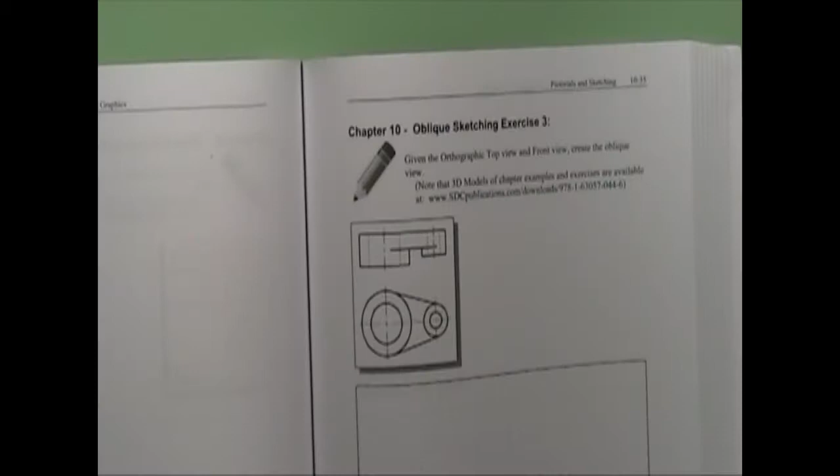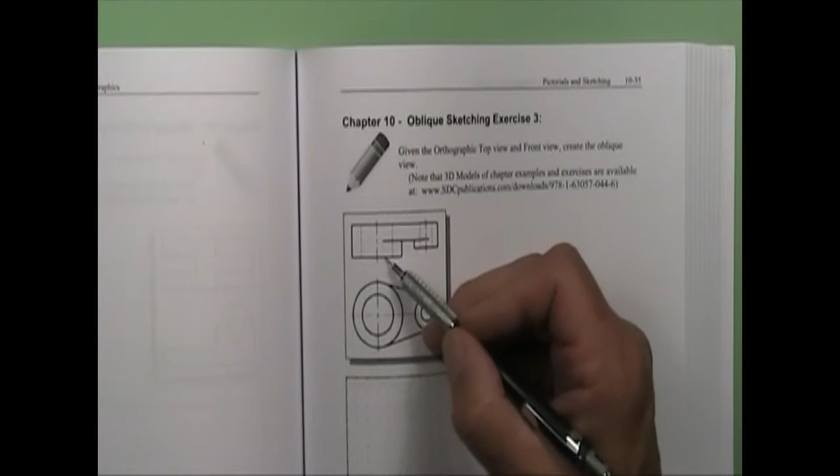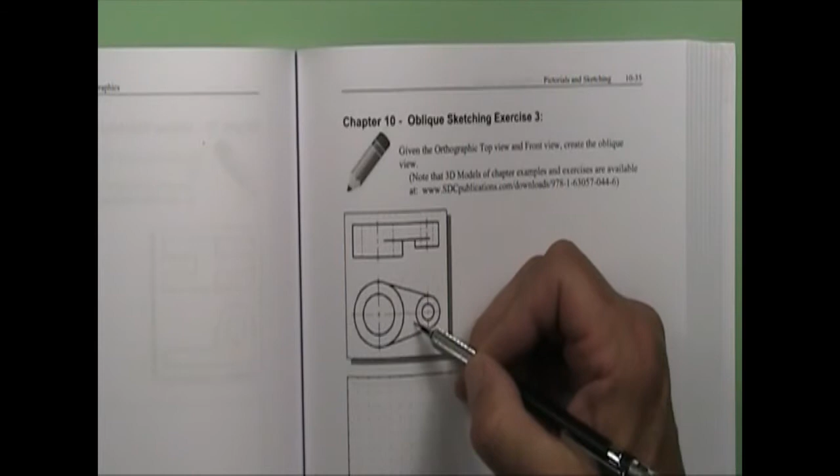All right, this oblique can be a little confusing if you've never drawn obliques very often. You remember my first video on these, I said you're dealing with surface planes as you're moving back. So here we have the front plane, which is going to be this circle. Then the second plane back is here, which would be these circles. The third plane will be this surface that joins those two, and then the fourth plane is the rear.

But to draw these, you have to draw the front view first and then project everything back from the front view, because looking at the front view, these line up horizontally in the front, but as we project them back in an oblique, they will not line up horizontally.

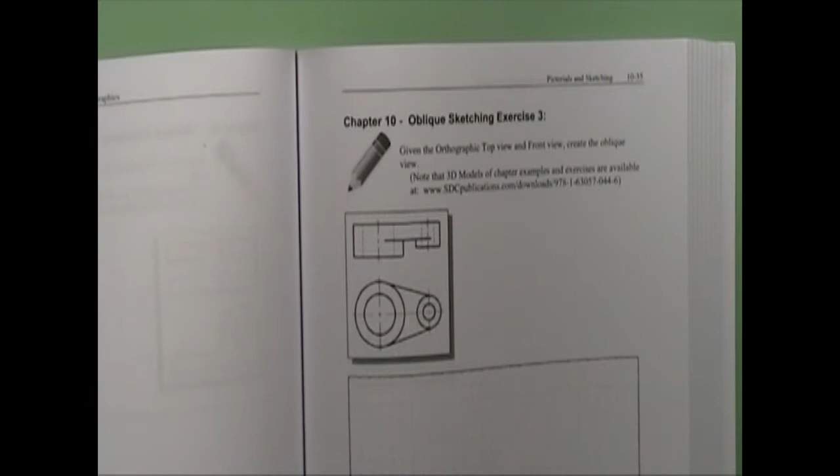So here we go. You take your paper, and I have already figured out where my object is going in here. I've already centered it, and I've drawn a square here for the larger circle. And let's see, I just kind of extended the lines across. What I want to do first with this is go ahead and mark my center lines for that large circle. I'm going to concentrate on the large circle first.

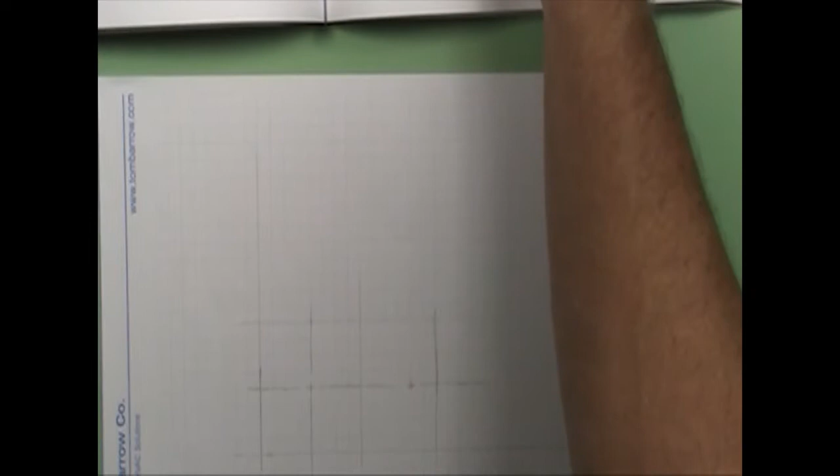And then I want to come over here to the right and draw in the center lines for the smaller circle. And that is 1, 2, 3, 4, 5, 6, 7, 8 squares across. Okay, and then another 1, 2 squares to the end. So 1, 2. Okay, and let's see. Oh, that was 2, so it was 4 squares. So I'm going to go ahead and draw a small square for the circle on the right. I don't really need it. I do need where the center lines and stuff cross up here though, and there.

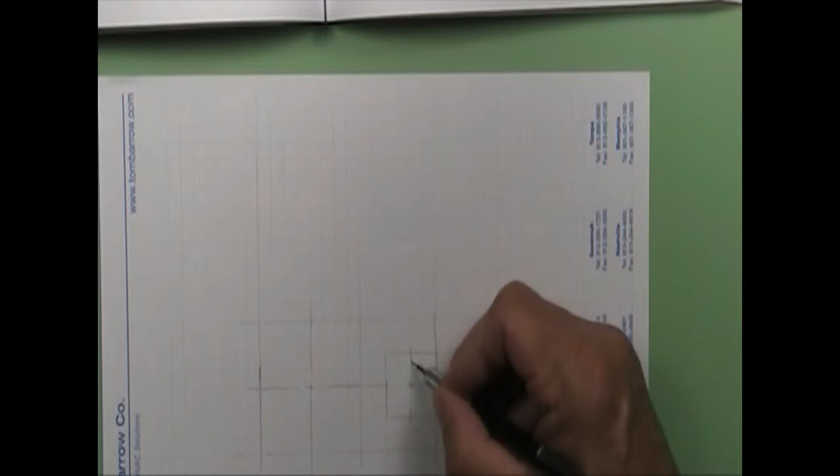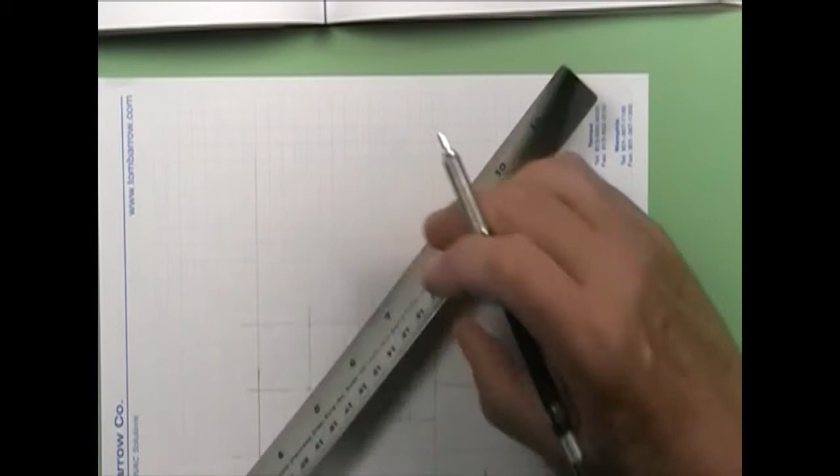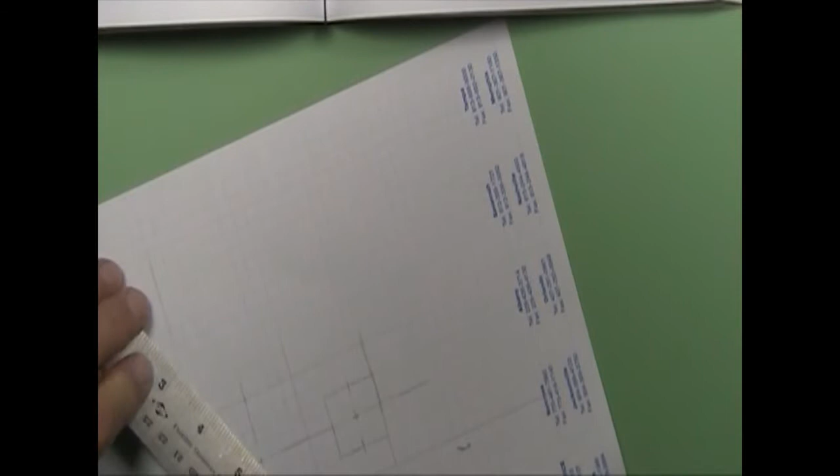All right, so now we can go ahead and draw in our large circle here. And you remember the little trick where I used the paper to do that? I'm going to go ahead and measure. So that was 2 inches, and I'm going to lay that down and mark an inch both ways so that I'm getting a diagonal. And since this is a little bit larger circle, you can put in additional diagonal marks. You don't have to use just one. Okay, and now I'll go ahead and lightly put in the large circle.

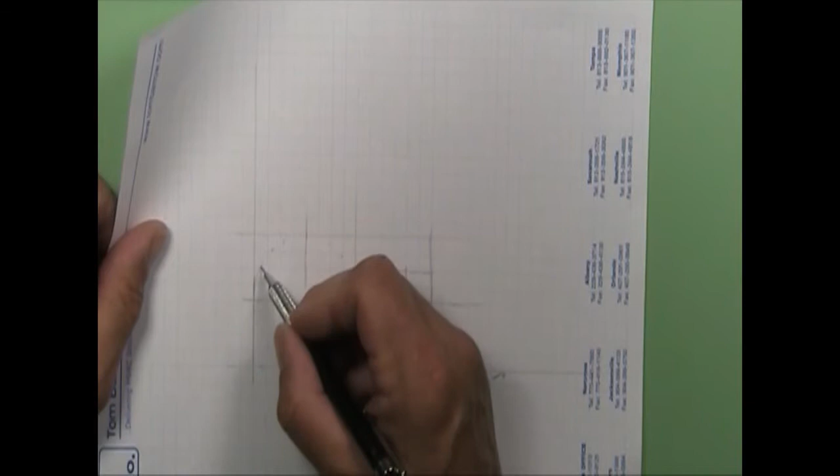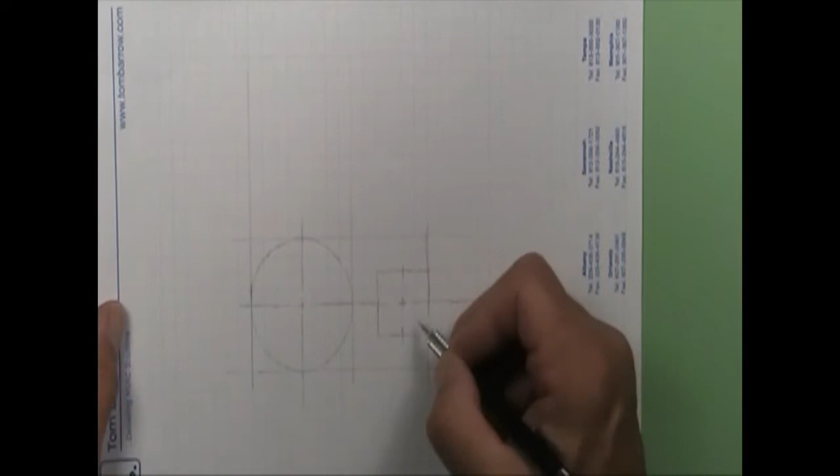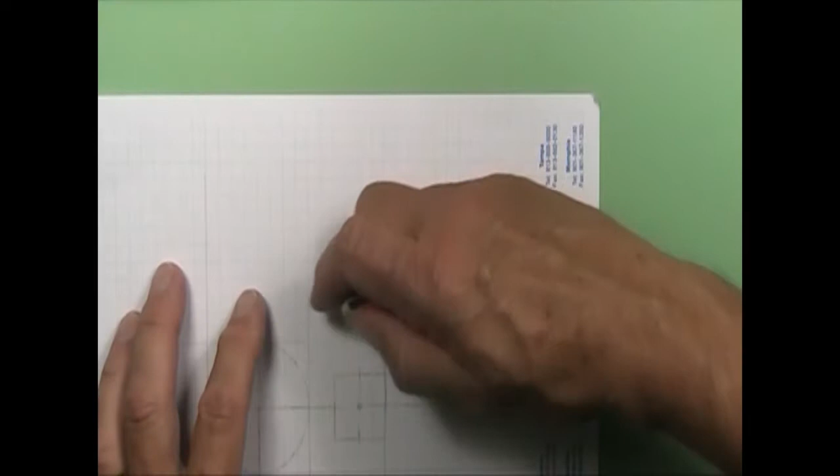Okay, so I've got the large circle here, and I've got this little square of where the smaller circle would go. Now what I need to do is I need to project back, and we're going to go ahead and go with 45 degrees again. And so I need a lot of points, and we'll start with the smaller circle here, and I'm going to erase out some of this. I don't need the corners of the square up there. Okay, so I'm going to go from the center, and I'm going to project back at the 45 degrees, if I can see straight to get it lined up.

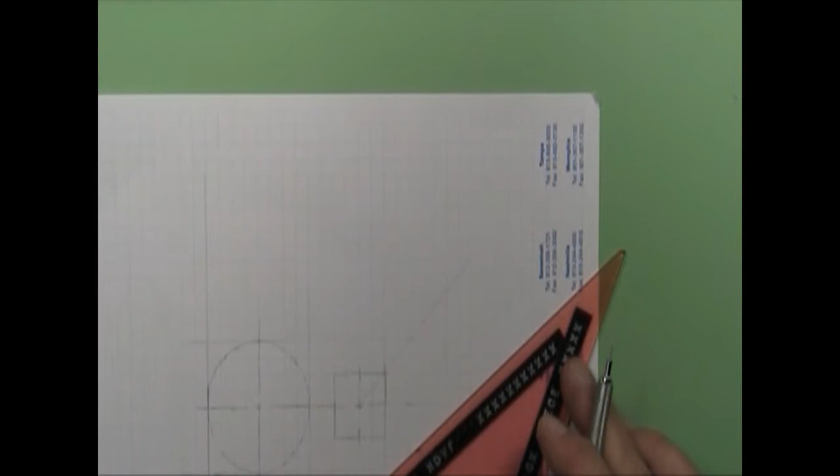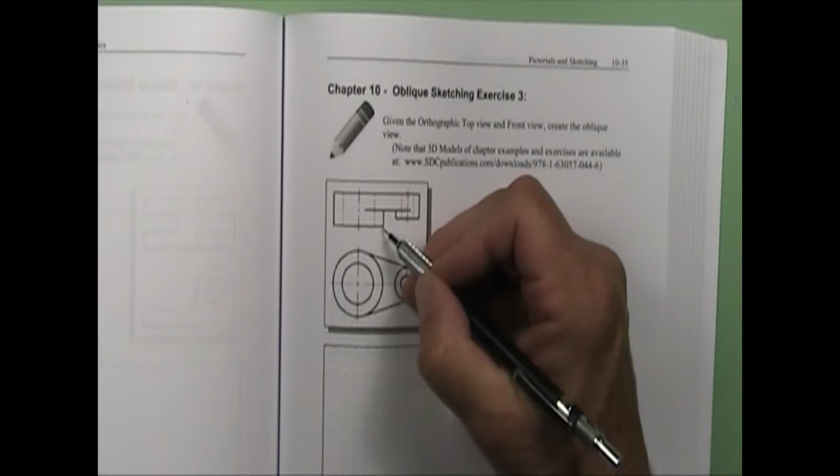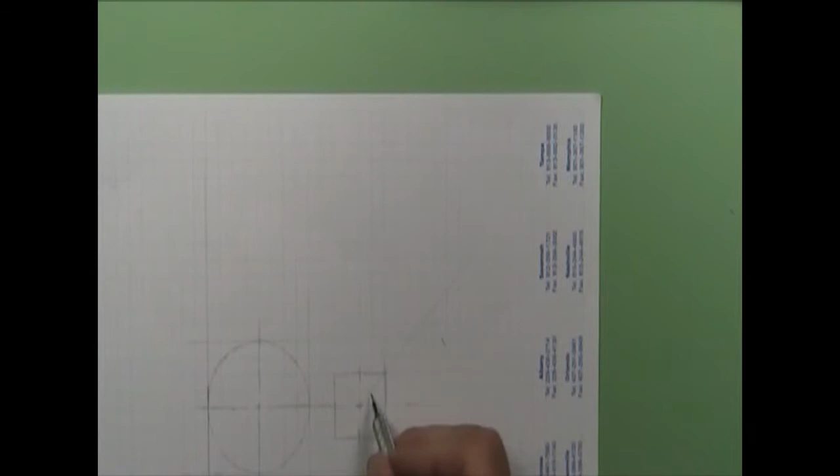Okay, all right. Now then, I look in the book and I see that from the front plane to the second plane is 1 square. So that's going to be 1/4 of an inch back. So I'm going to measure 1/4 of an inch back on that diagonal line and put a mark. That is the new center mark for my circle. That's where the center of the circle is actually going to be.

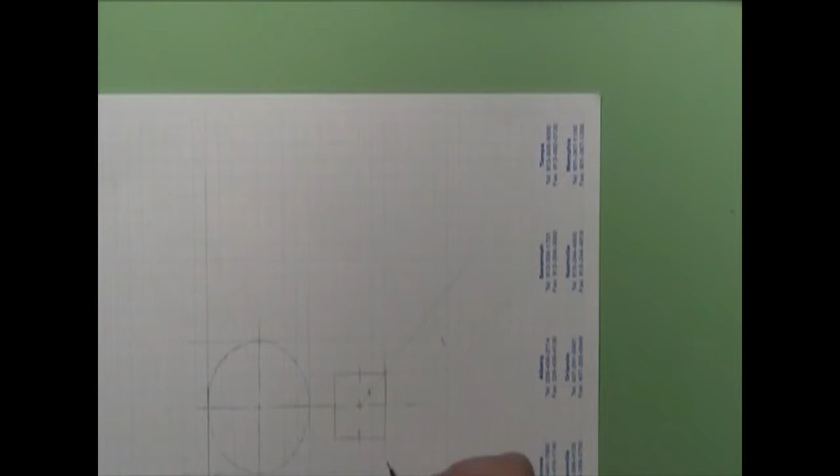And because I drew this square, I really don't need it. I can project back from that, or you can work just from the center line itself. It's probably more accurate just to work from the center line itself. So I'm going to take that out. Okay, so what I kept, this is my original center mark. That's the 1/4 inch back. Now I need to draw my circle that is 4 squares diameter. Easy.

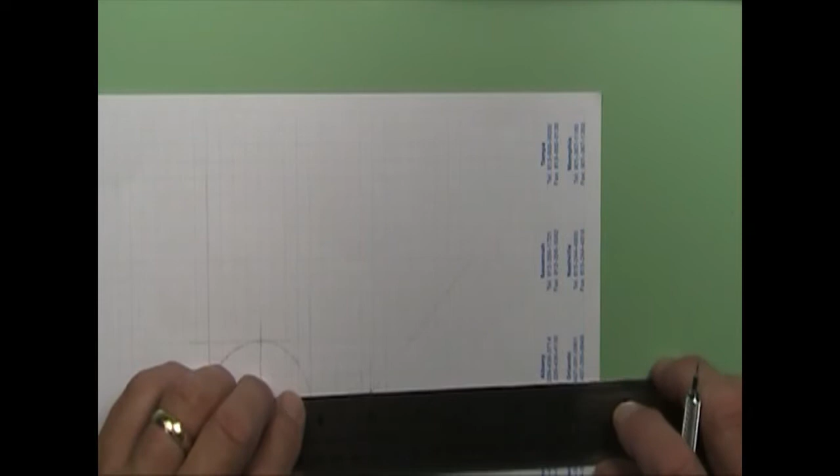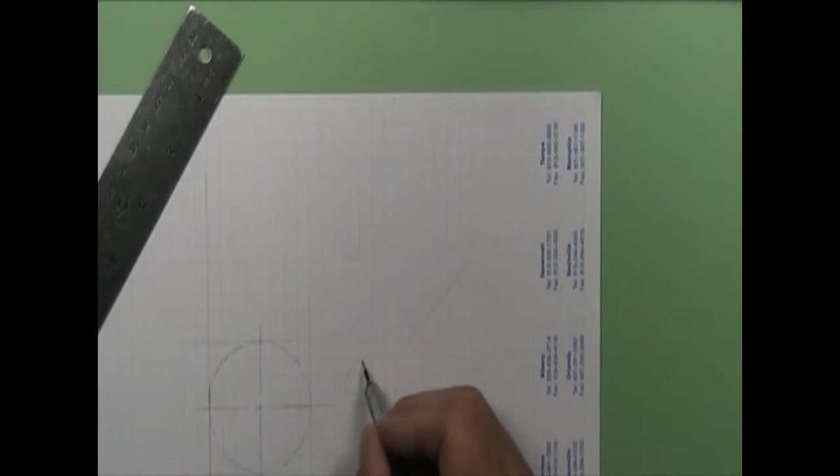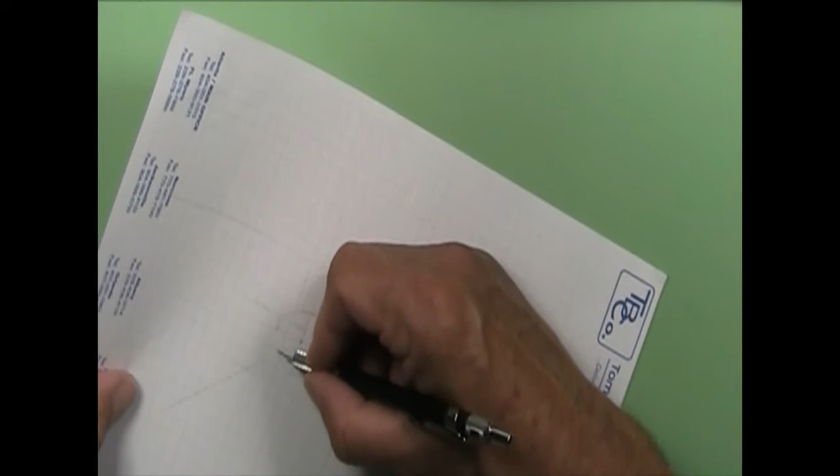I'm going to go ahead and do a center line for those. And I'll measure that. 4 squares is going to be 1 inch, so it's a 1/2 inch in either direction. But since they're not lining up on the grid, measuring is a little easier. And if you want to measure diameters, you can measure and mark the diameters. And so I'll sketch in my circle. Okay, now since those are both finished pieces, I'm going to go ahead and darken those. It'll be a little easier for you to tell.

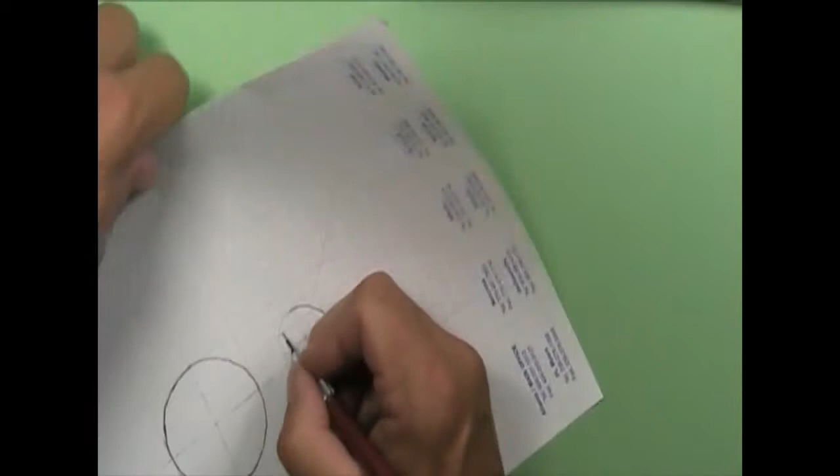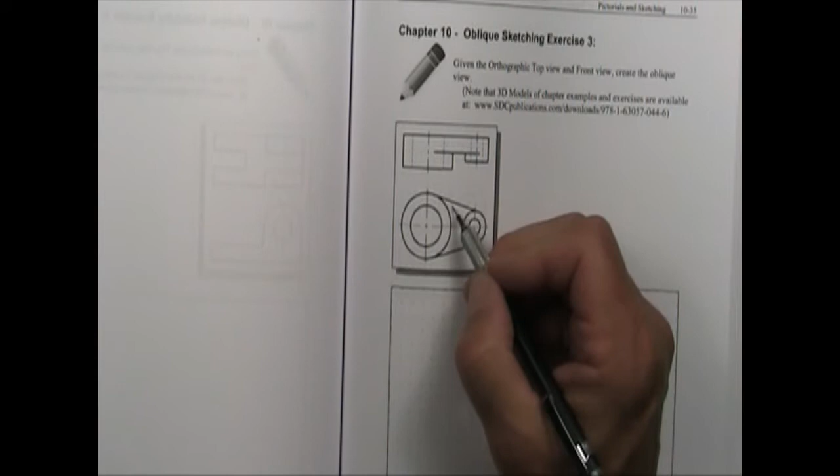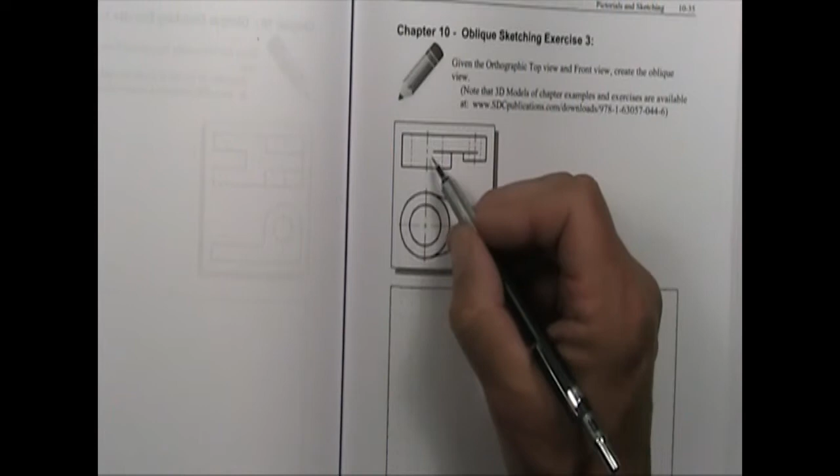Okay, so this is plane 1, this is plane 2. Plane 3 is 1 square back from here, and what I need for plane 3 is where this surface intersects both of these larger circles. So I need these points here, and they come up to be tangent. They're not at the center marks or the quadrants, but they're tangent to these large circles.

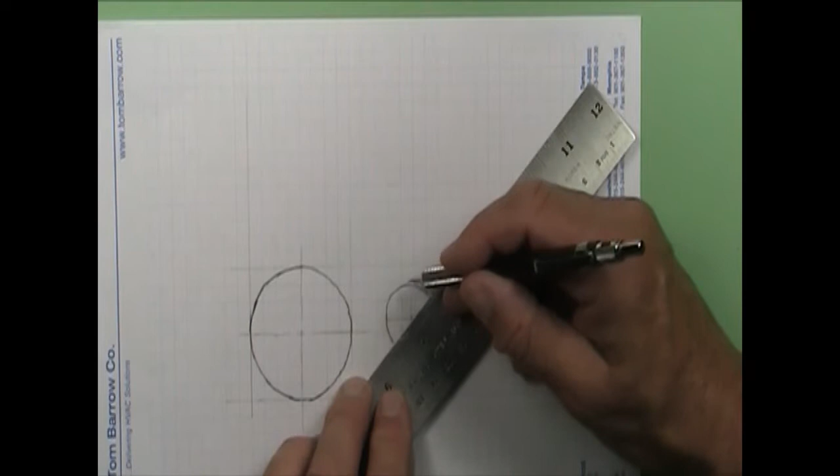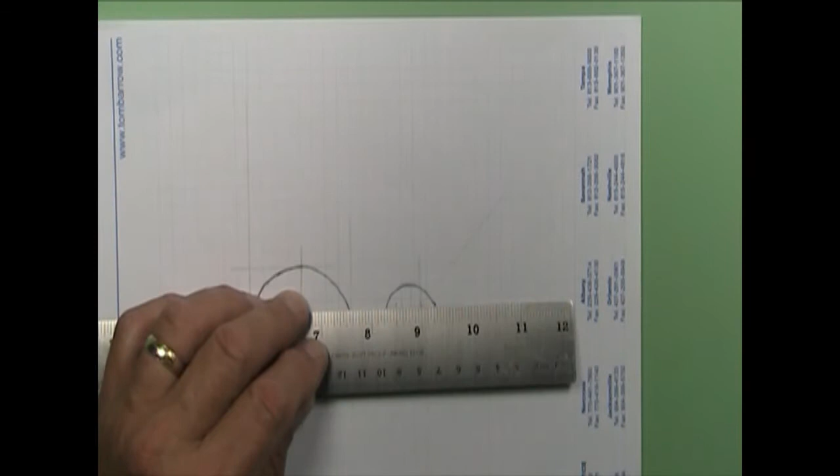Excuse me. So I have to draw those circles over again. So we know coming back here that it's 1/4 of an inch back. It's 1 square back. So I'll repeat the process that I did to draw the smaller circle. Come back 1/4 of an inch. And make my marks for a 1 inch diameter circle, so it'll be a 1/2 inch. And I don't need, well, yeah, I do need to the right. I was going to say I don't need, but since it goes beyond the quadrant, I need to put that mark in.

Okay, so here's my center. I'm going to pencil in those circles.

Getting a little confusing here, huh? What do you think?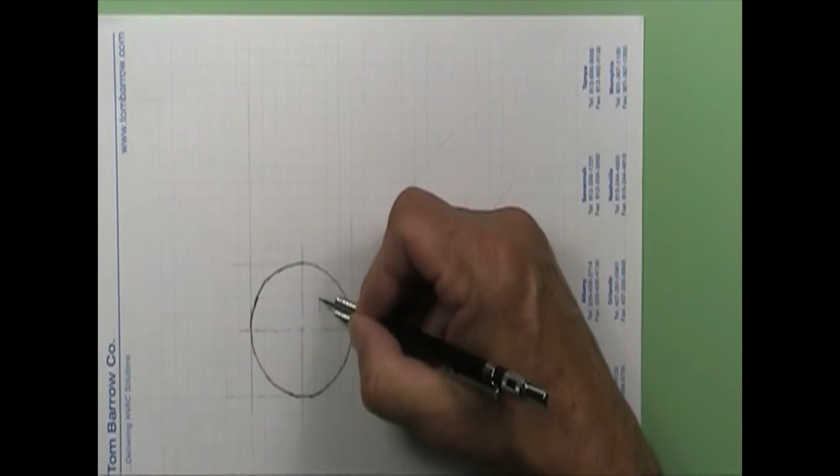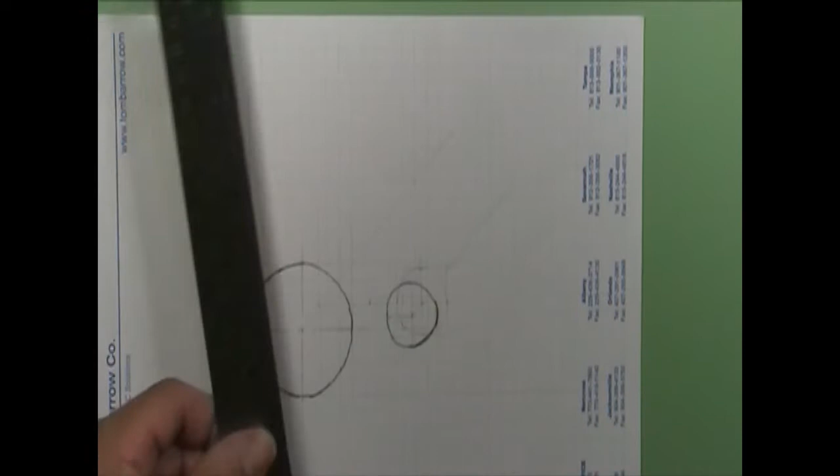Okay. Now I need to go back to my big circle, and let's project the center of it back at 45 degrees. And this was 2 squares back from this circle, so it'll be a 1/2 of an inch back. Now with this one, I do not need the left side. All I need are the right halves of the circles. And it's 1, 2, 3, 4 squares radius. So a 1-inch radius. And I'm going to go ahead and put in a couple of diagonal marks because this one being larger, it's a little more difficult to draw.

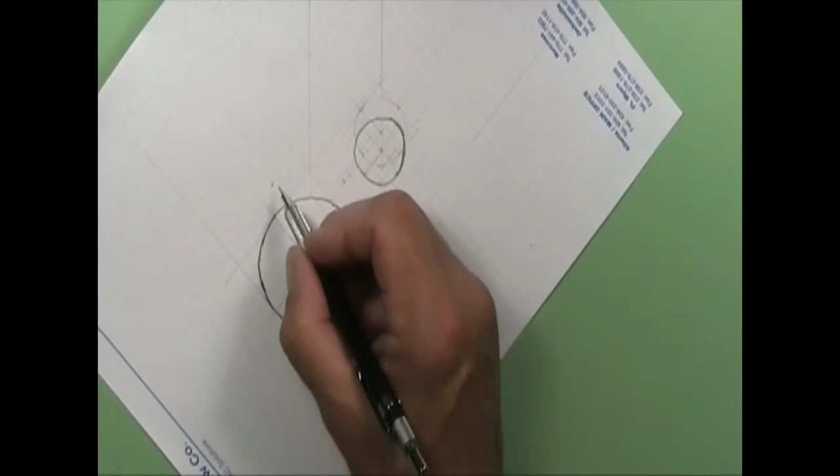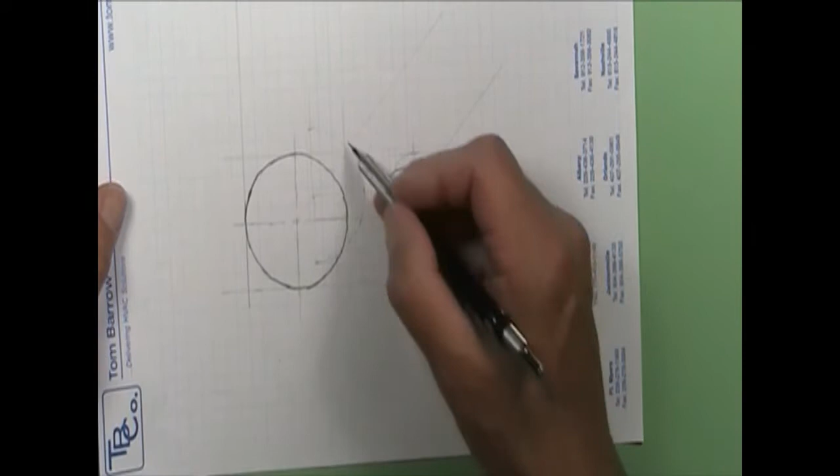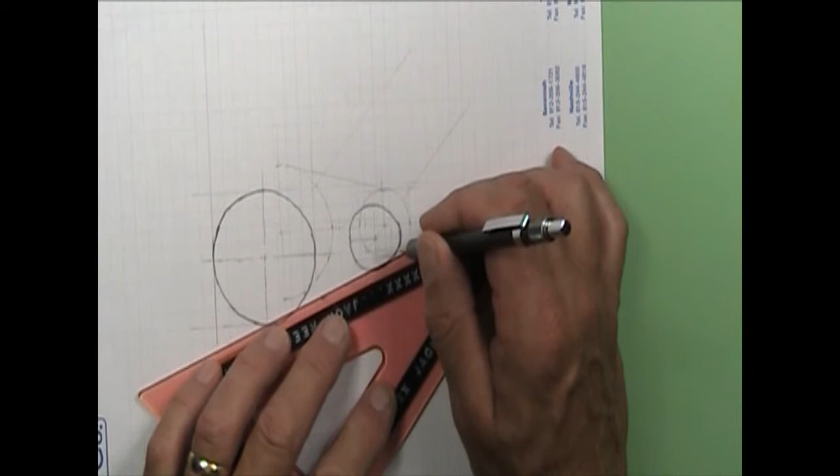All right, and now I'm just going to pencil in half of that circle. Okay, so I've penciled in half of it. What I need is a line that's tangent for the upper portion of this arc to the upper portion of this circle. And so I'm going to use my straight edge and kind of line up until it becomes tangent with both of them. And I'll put a line across there. And I want to do the same thing on the bottom, even though it's behind both of those circles. I need to know where it's at because I'll be able to see it here on the bottom.

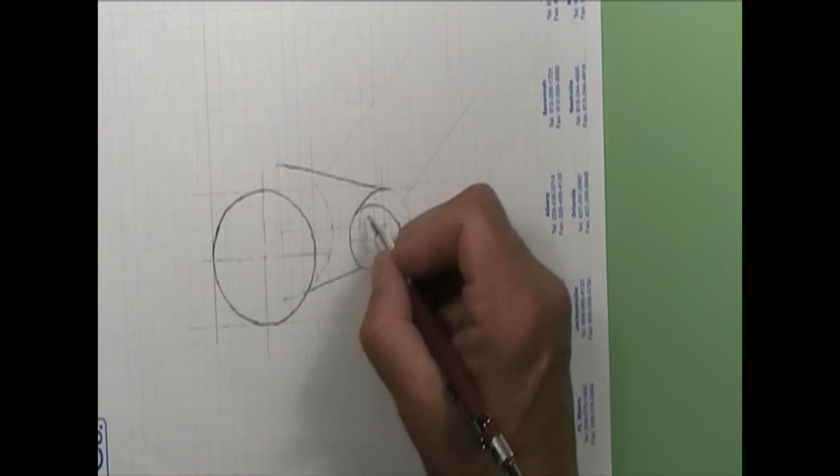Okay, and in this one I can darken that. I can darken that. Darken the arc coming back, and remember this will become a straight line that's going to be tangent because you got one circle going behind another circle. We do a straight line that's tangent, and we'll do the same down here, going tangent from one to the other, and then I'll finish that arc.

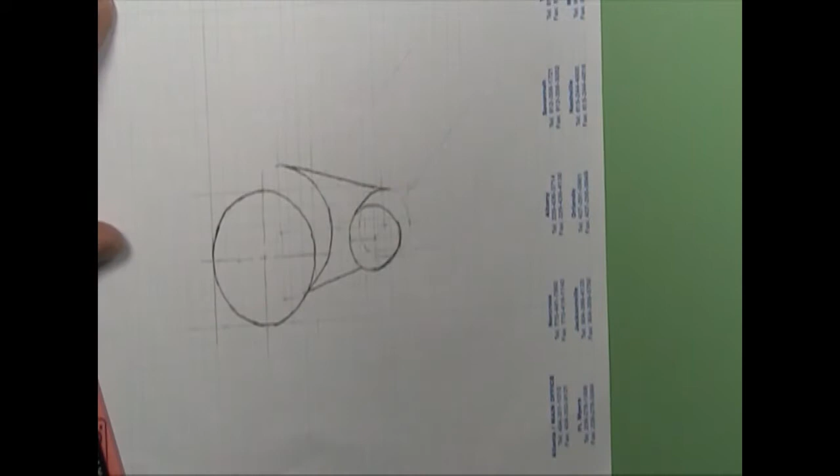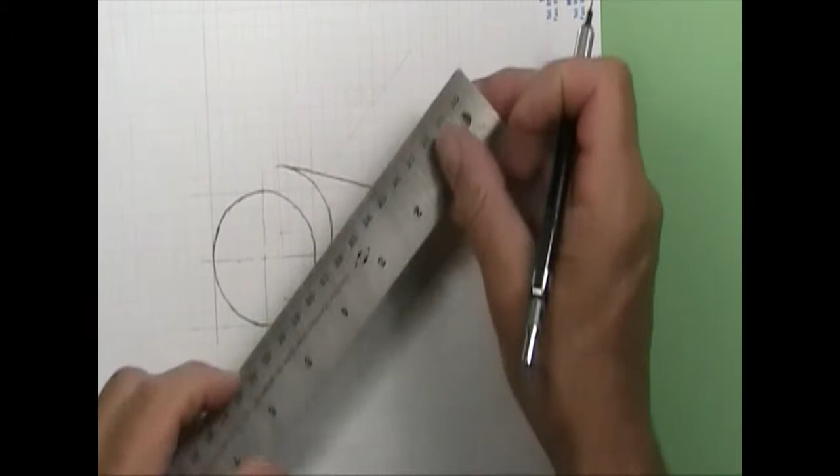Okay. Now we don't have anything right here because that continues on back. Same way over here, this continues on back. So now I have to repeat that same process for the rear surface to get the rear arcs in. And in here it's 4 back. So that's 1 inch back. That puts the center right about there. What's a 1 inch radius?

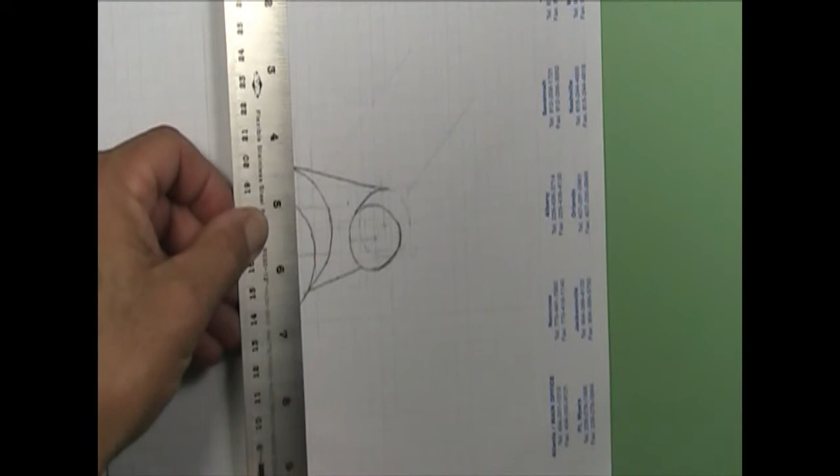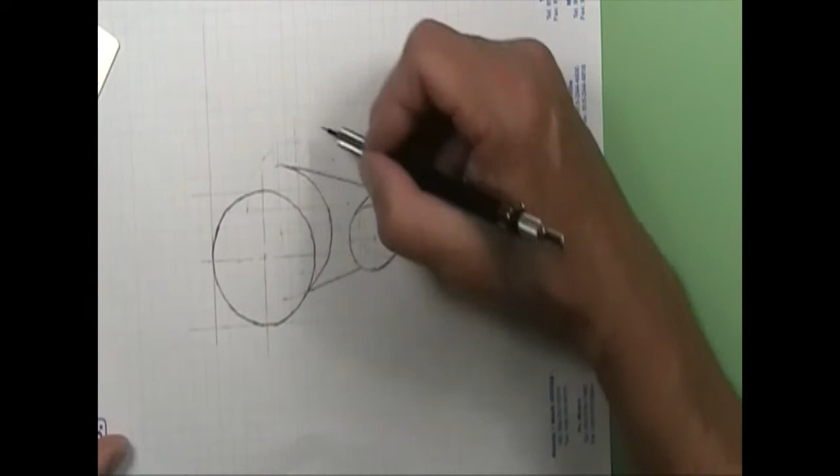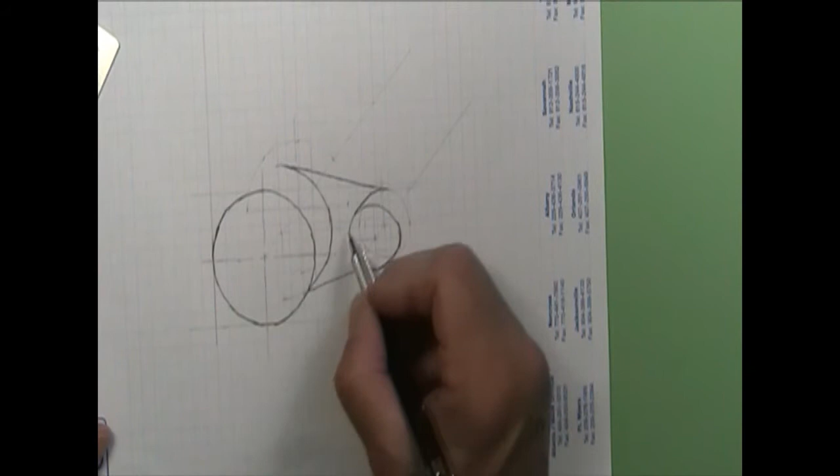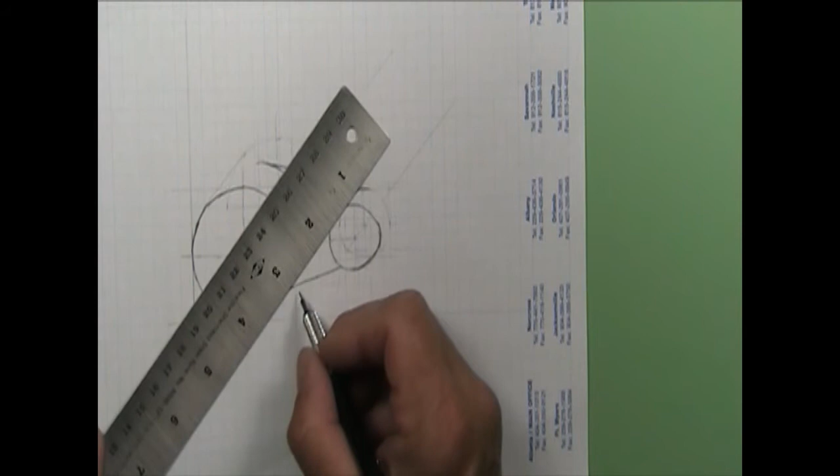Okay, now I can kind of pencil that in. And I don't really need this information in right here. Right here I'll have a tangent joining those two, and then there would be a tangent down here, but it's pretty much the same location as that one right there would be.

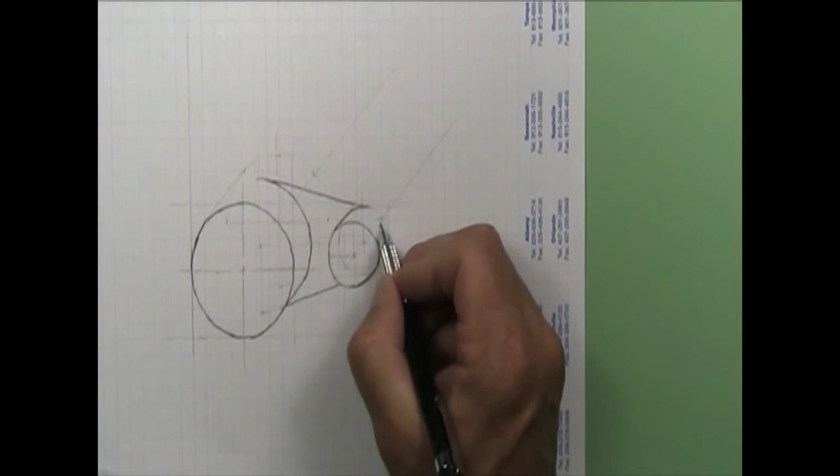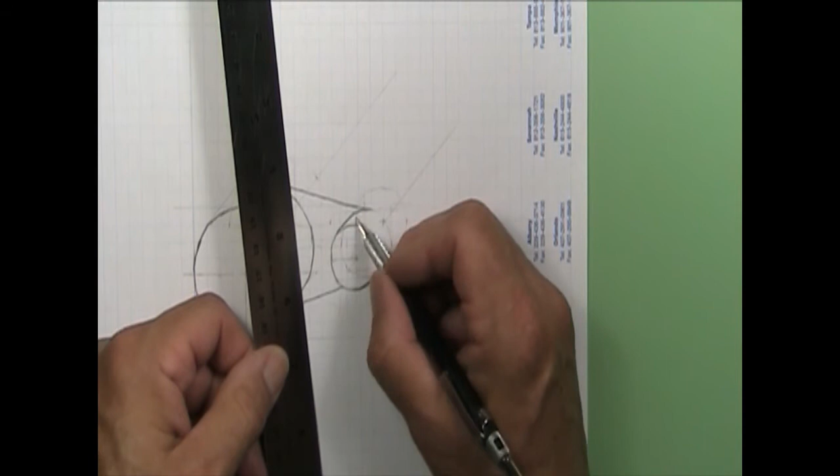Now I need the same one for the rear back here, and I can just project this center line on over until it hits that projection line. And then I can measure that out. Very confusing, I know.

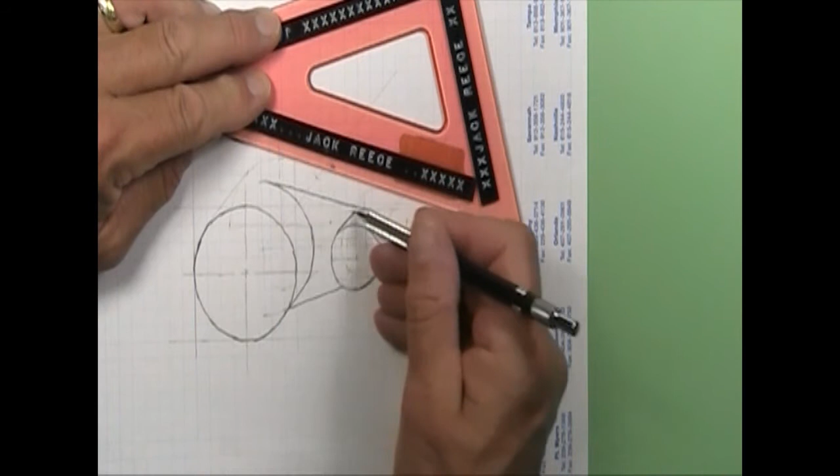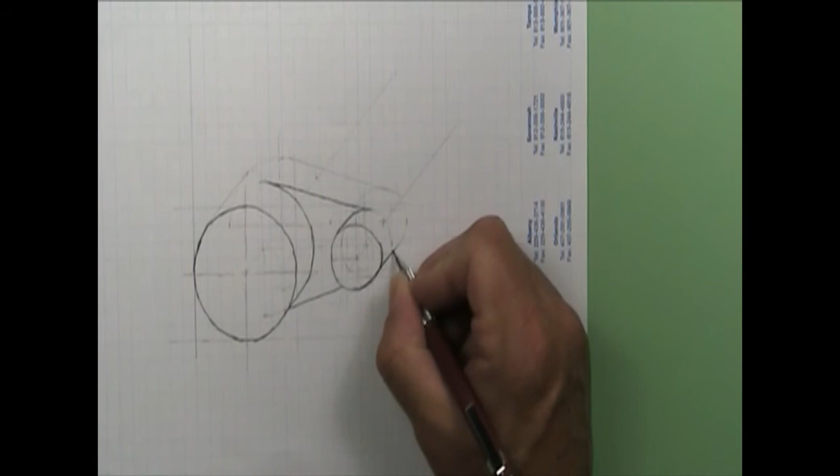All right, so I've got the rear arc, both rear arcs. They're joined by a tangent line. So I just want to lay a straight edge up there. And it'll be parallel to this line, just further back. And then across this bottom, I will have a tangent line. And we've already put the tangent line in there. And so now I can darken, and then what remains is to erase out a gazillion construction marks, eh?

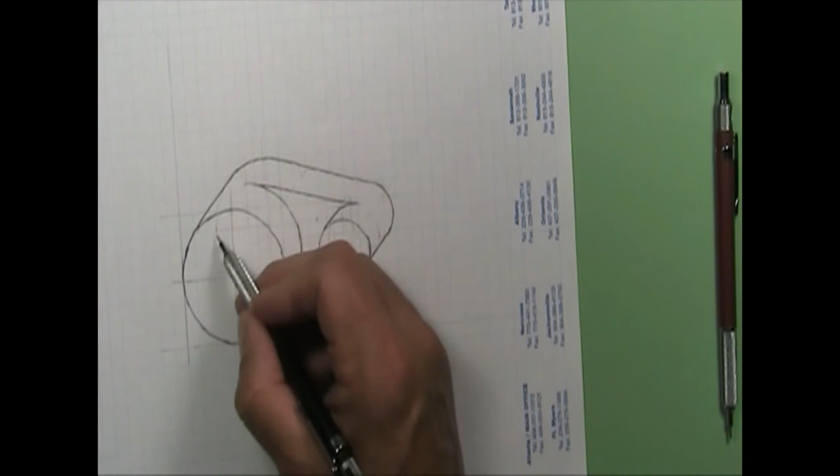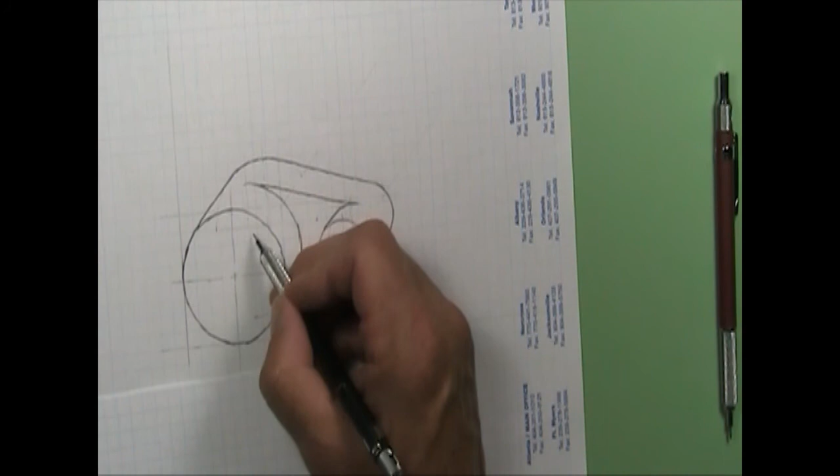Okay, so I'm not going to draw these inner circles. You can do those, it's exactly the same process. Circle here, circle here. The problem is on the rear, you can see the hole where it exits. So on this plane, the rear plane, at that center mark, you need to draw the smaller circle, the hole that goes through it, because it's going to intersect with the front surface of the hole.

And then you'll put your class, assignment name, number, stuff like that on your paper. All right, cool beans. If you've got questions, ask me or the lab assistant that's on duty in the room.